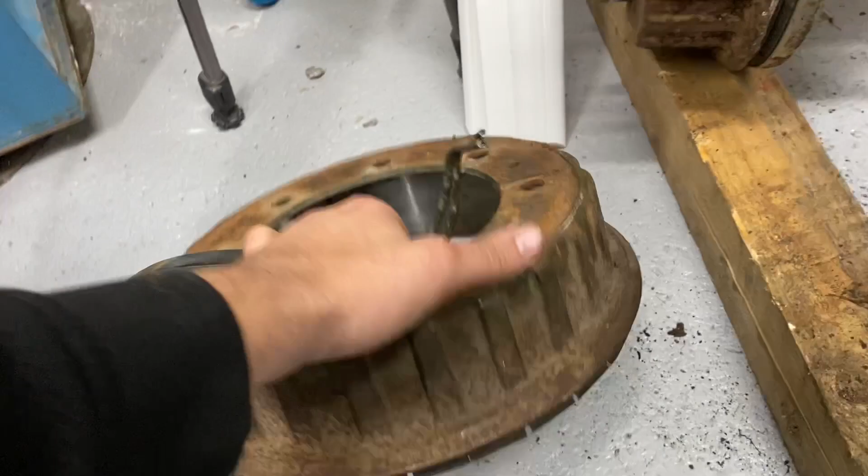My name is Robin and this is the first episode out of two where I'm gonna disc brake and 6-lug convert my Volvo TGB portal axles. Welcome. So right now I'm removing the drum brakes, and here is

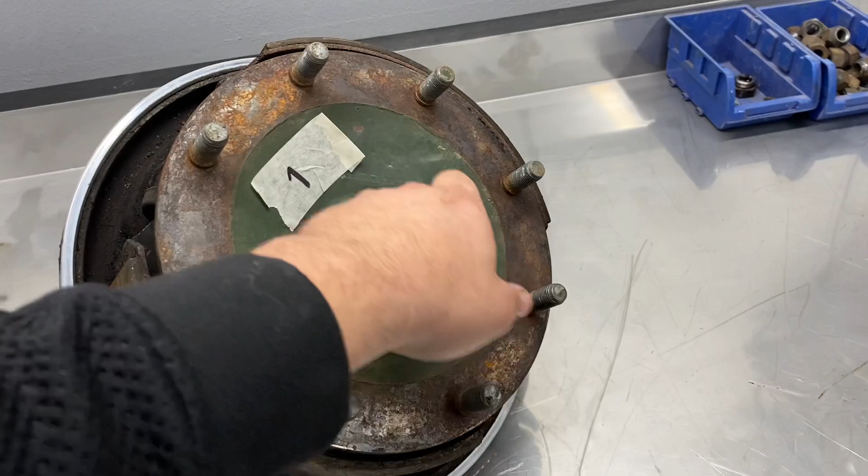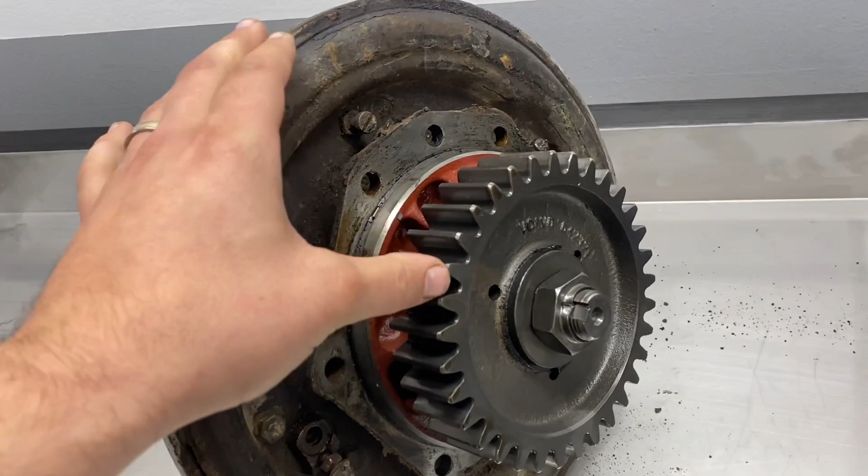the 8-lug oddball pattern. So this one is gonna be machined and I'm gonna have the 6 times 5.5 pattern here with disc brakes. So it's a little bit of a pain in the ass to get it off. So I'm gonna remove this gear to be able to get this disc off. So that's what this episode is all about: how to remove this mounting plate from the portal axles.

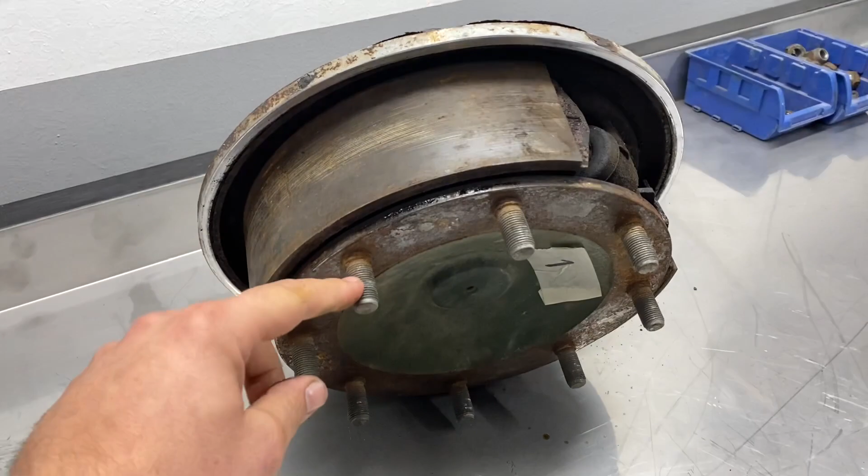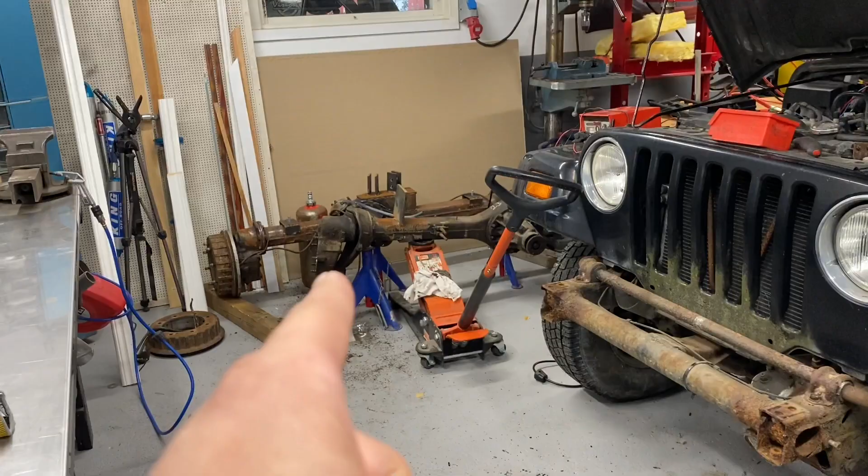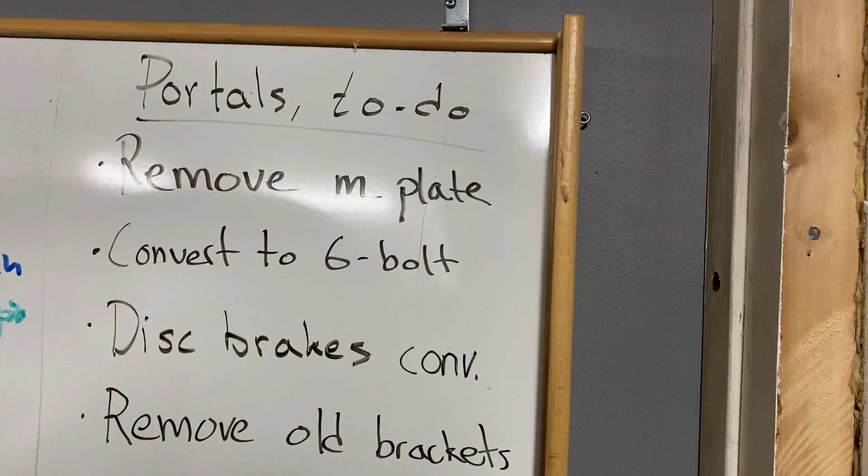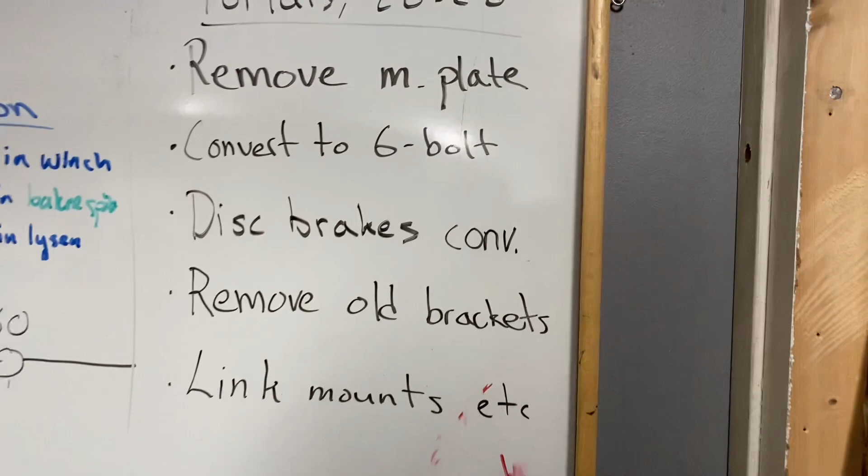Here's a TJ, and those portal axles are gonna be fitted underneath this one. What I'm gonna do before I put them under the TJ is remove the mounting plate where you fit the tire on, because right now it's an oddball wheel pattern. So to be able to use more standard wheels and rims, I'm gonna convert it to 6 times 5.5 bolt pattern. I'm also gonna install disc brakes instead of the drum brakes.

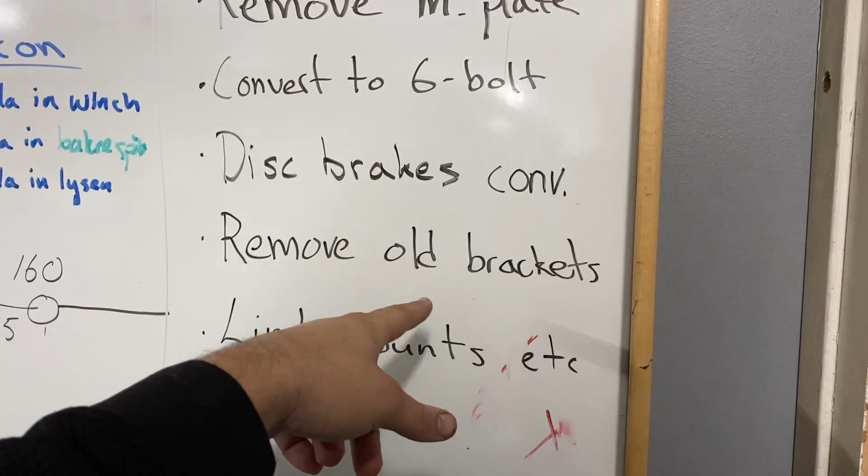I'm gonna clean the axle tubes from the old brackets because it's a leaf sprung vehicle. And now it's gonna be on coilover and link suspension. And later on there's gonna be link mounts welded to the axle tubes as well.

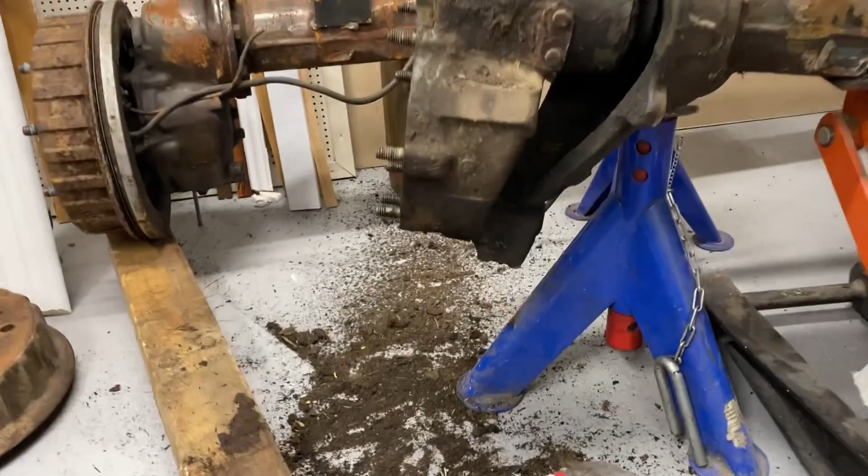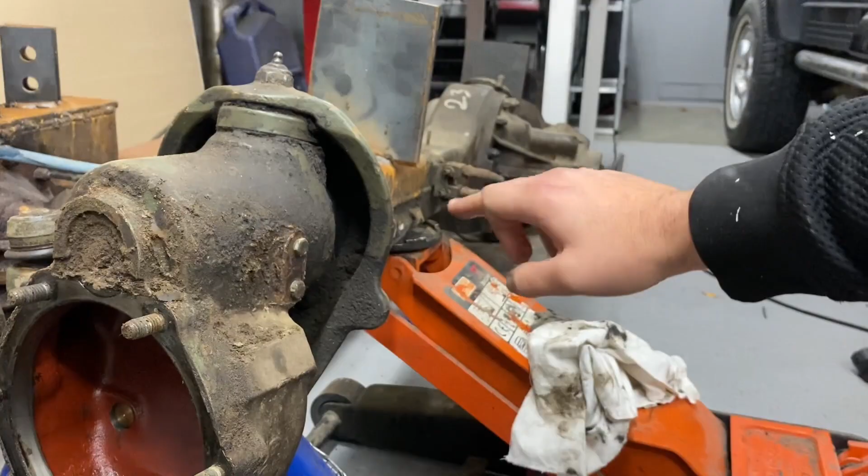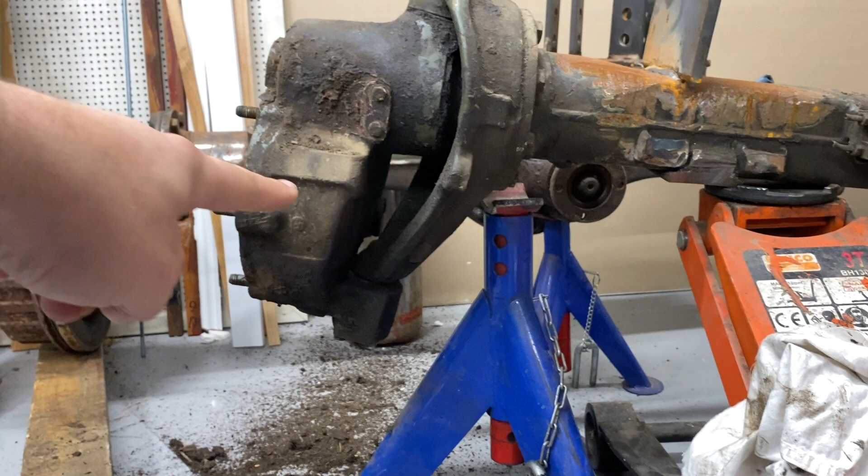As you can see, someone has driven them off-road once many years ago, probably, so there's dirt everywhere. But here's the portal hub. So you have a gear in here where the drive shafts are connected, and then you have a bigger gear, so you have the gear reduction here, which makes the offset from the center line of the axle tube to the center line of the wheel, and that provides a lot of ground clearance.

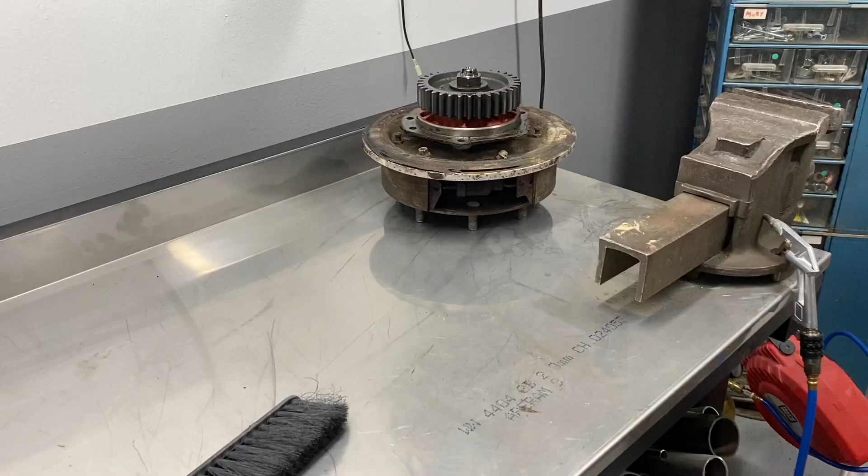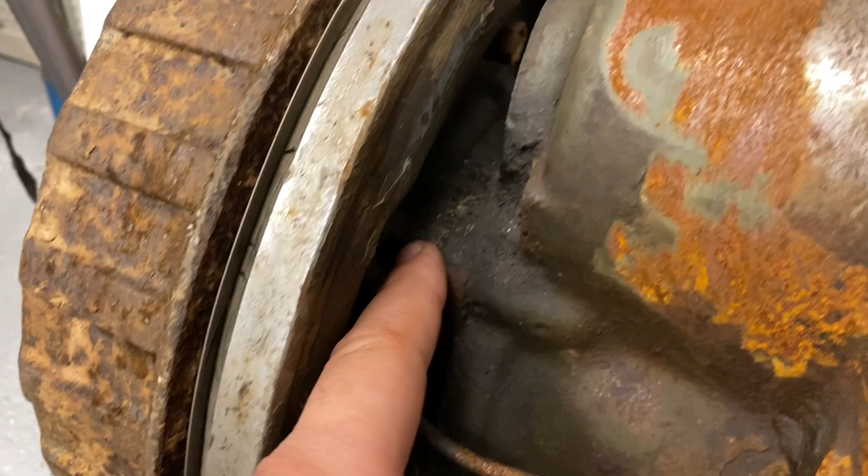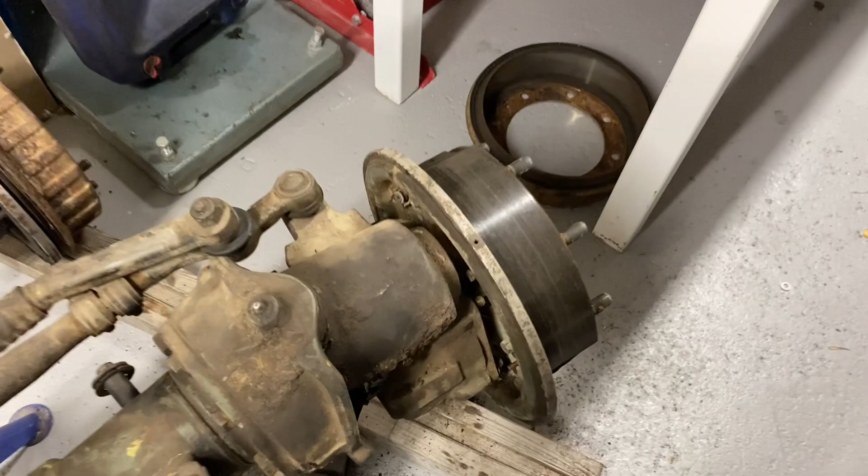To remove the complete wheel hub from the portal axle, you remove the 7 bolts in this flange. You can see them, there's one, there's another one down there, and all around. Remove those and you can remove the whole part. So on this side I have removed the 7 nuts. So now I can use a pry bar to carefully pry it out, because it's gonna come off here.

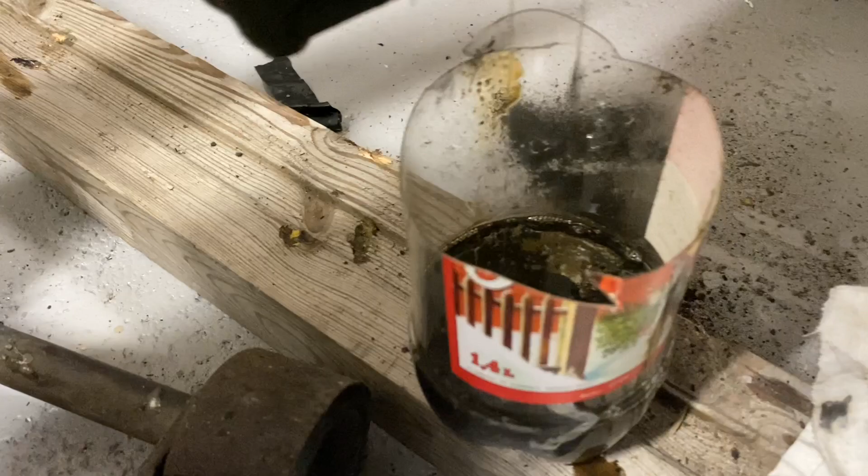But before you do that, there's an oil drain plug underneath here, this one, because you have some oil in these reduction gears. It will be less mess if you remove that oil now before you remove this one. As you can see, it's not super much, but it's a little bit of oil in there.

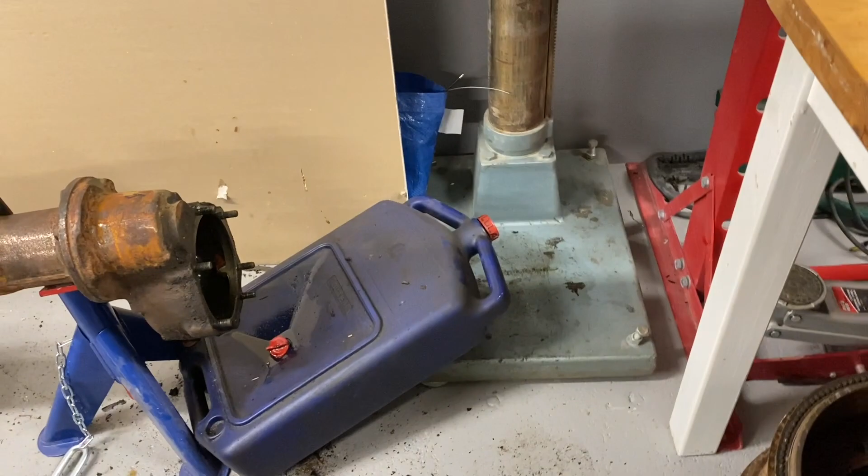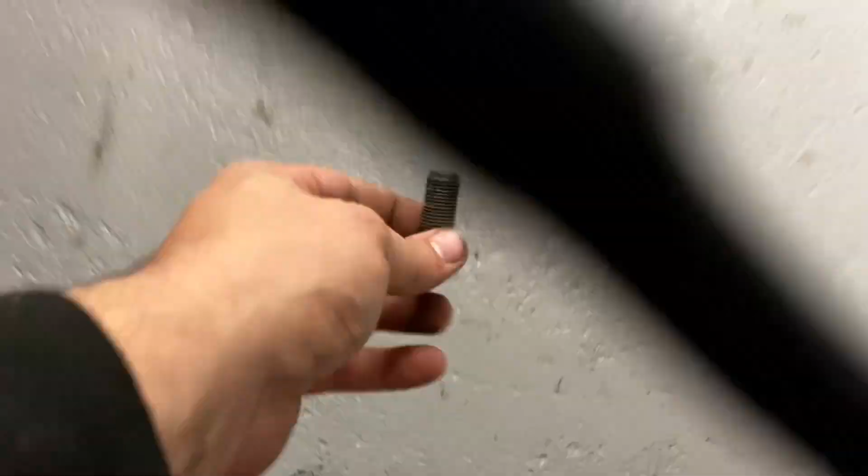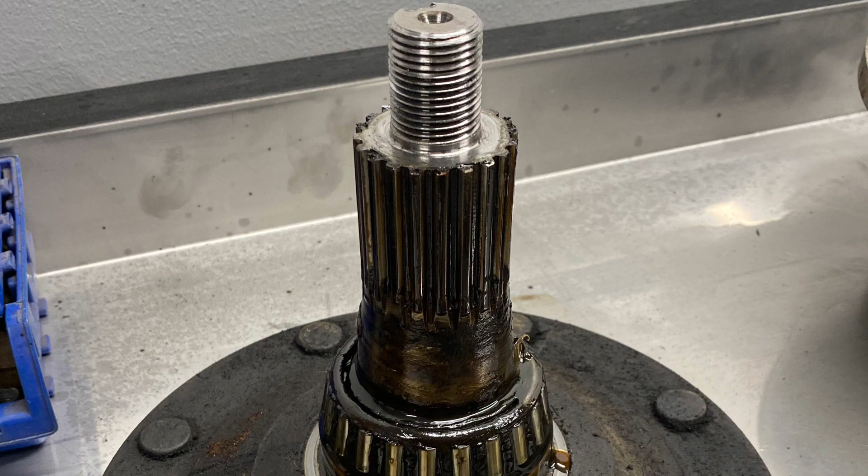When you remove the wheel studs, the only thing that's still fitted is the bearing. You could cut off the bearing and throw it, but if it's in good shape, you can reuse it. But to get it off without destroying it can be a bit tricky. So that's why I went to the guys in the off-road cave in Stockholm, because they have all the original military tools for these axles.

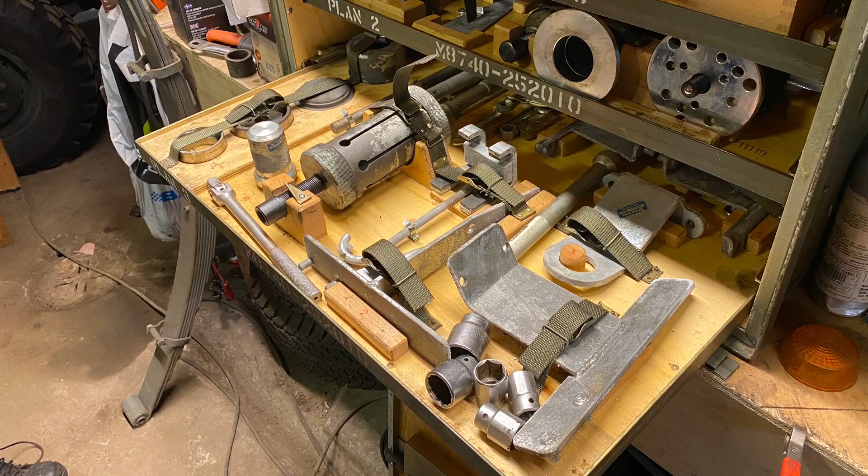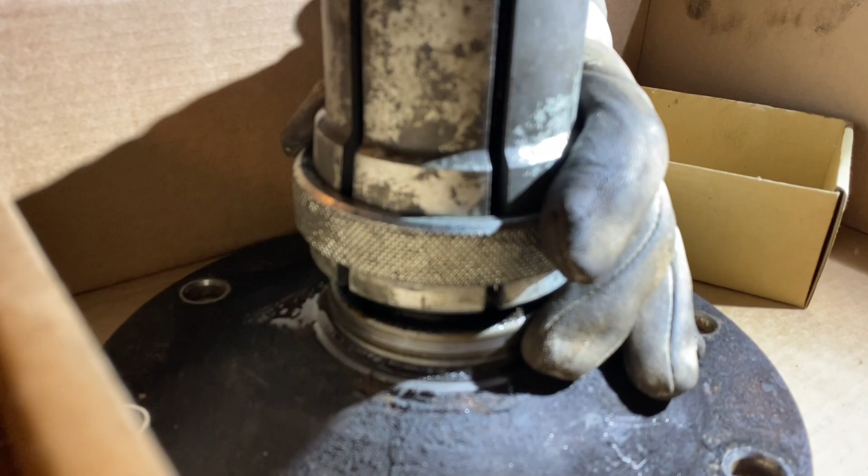And one of the tools is a special puller for just these bearings. So we went there and they helped me remove the bearings. If you don't have access to a bearing puller like this, I will put the part numbers for the bearings in the description below.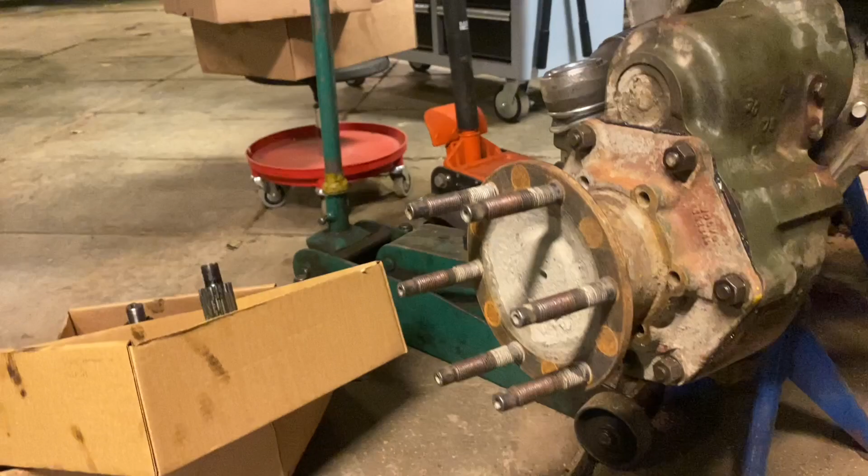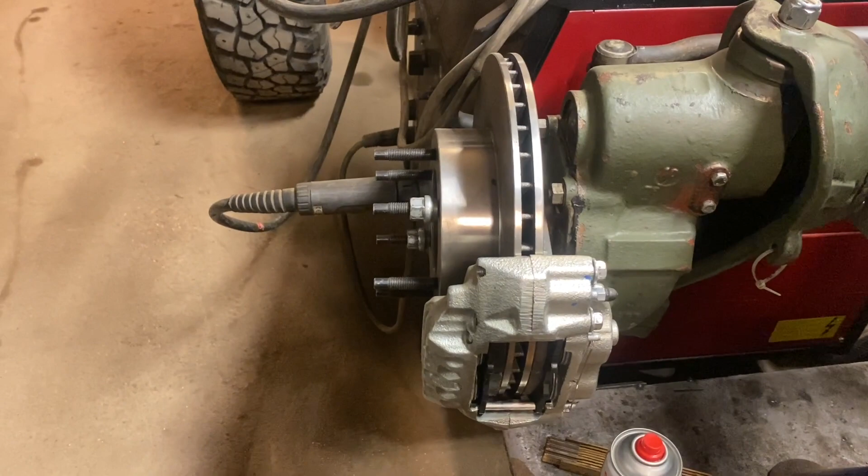In the Jeep cave you can find some really cool rigs with these Volvo portal axles. And this is Jacob's new rig, a fully tube chassis with, of course, the Volvo portal axles, and this has also been disc brake converted with the same kit that I'm using. Now that the bearings are removed, these mounting plates are ready to be machined by Mahlin Advanced Mechanics.

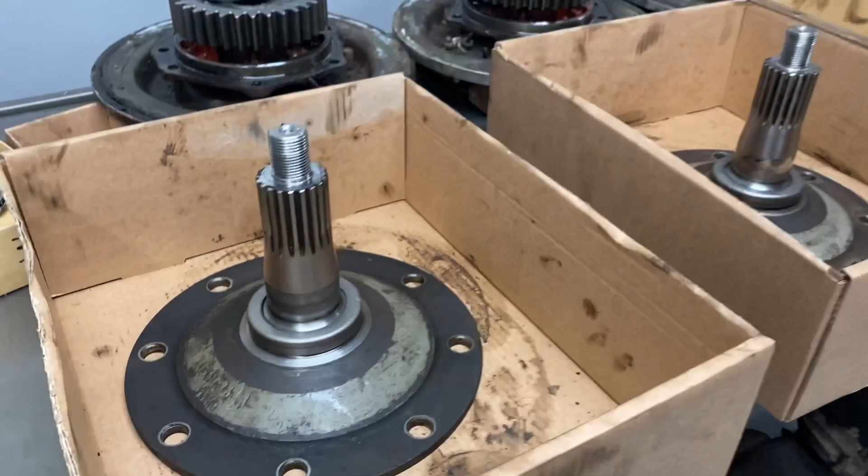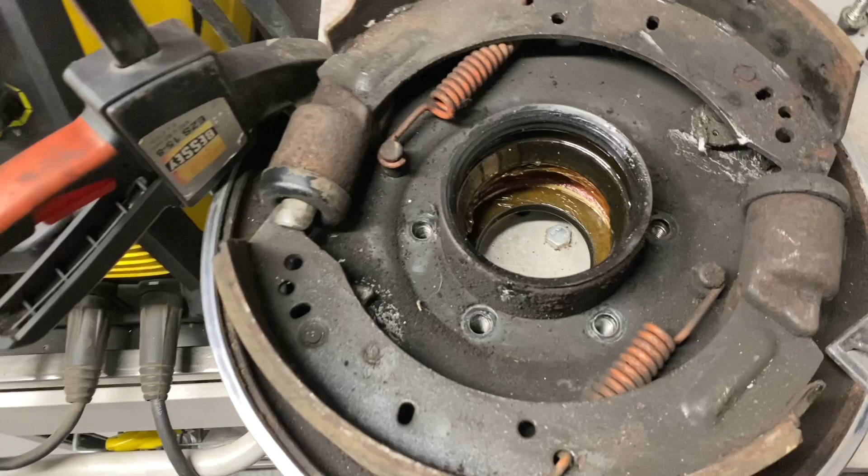Next step is to remove the mounting plate for the drum brakes. When you remove the springs and the bolts, it should look like this. It's this big part in the middle that you want to remove from this big plate. To remove it, it's easiest to do with a press and some pins. You fit these pins in the 4 holes, as you can see here. There's one, another one, and the 2 more.

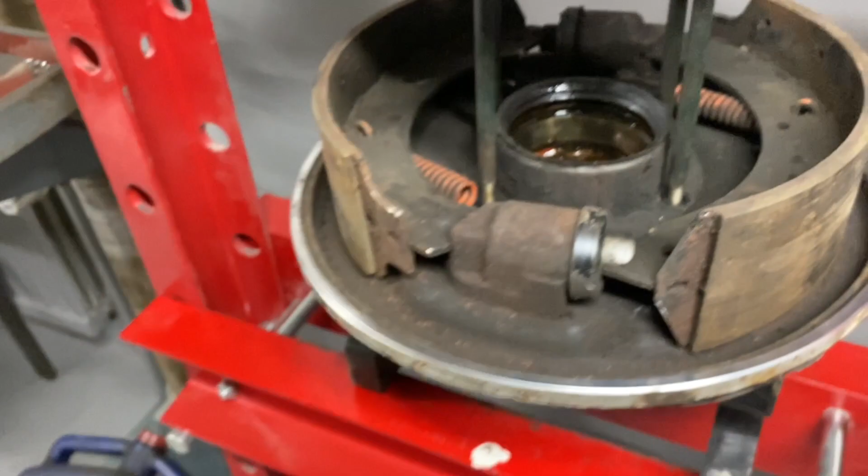I put a plate on top of the pins and carefully press it down. And you can see that the big chunk in the middle is slowly coming out. So be careful so it doesn't drop to the floor, and put your hand like this underneath it and it will come right out. Now that the mounting plate has been removed, it should look like this.

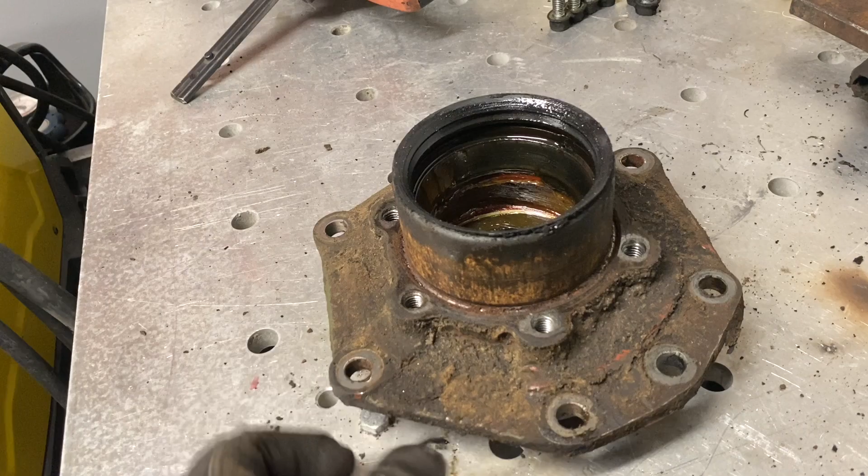It's really dirty, so it's a good time to clean it off, and be careful with this edge here. It's a rubber sealant for the bearings. So do not damage that one.

There you have it. How you remove the mounting plates so they can be machined and converted to a 6-lug pattern with disc brakes for your Volvo TGB portal axles. In the next episode I'm gonna show you when I assembled everything back together and finalized the 6-lug and brake disc conversion.